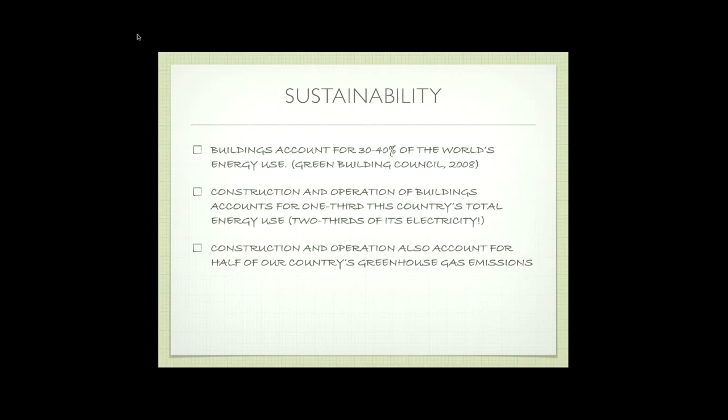So we get all up in arms over our cars and what they're doing to our environment, and very rarely do we actually consider that buildings are doing half the damage. That's why the theme of sustainability becomes important in this sort of class, and it'll be something we touch back on as we go through the semester and talk about these materials and why they might be good or bad.

So, does anybody want to take a stab at defining sustainability?

Something that would not be replaced or used up. Okay, sure, I like that. Anything else? Exactly, very good—use and reuse. Anything else anybody wants to add?

No? Okay, so the technical definition is meeting the needs of the present generation without compromising the ability of future generations to meet their needs. This is kind of the boilerplate example, but the big thing is that we're not depleting the resources that somebody else might get to use in the future. We're trying to be neutral.

We talk about being carbon neutral, we drive hybrid cars, we do all this kind of stuff. We talk about being green—it's the buzzword right now. We're going to try to go away from thinking sustainability in this class as 'I get to drive my Prius,' and instead talk more about what these building materials mean: how long do they last, can they be reused, those kinds of bigger issues.

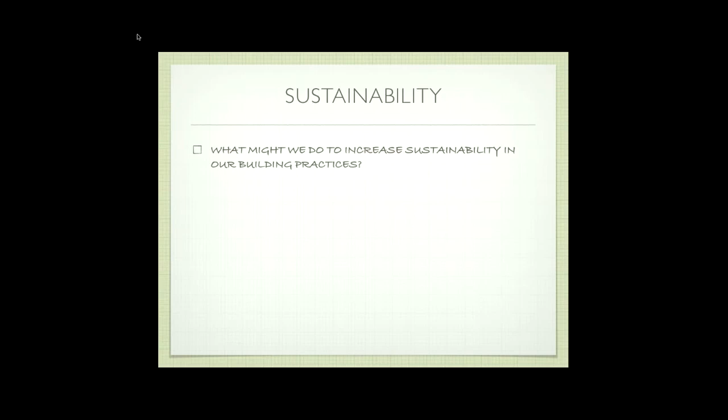Something that easily can be replaced. Right, exactly. Any other ideas? No? You guys are all quiet today.

It's okay. So how about if we use solar or wind energy? It's a renewable source of energy, so we're not depleting natural resources. It's something we can use over. What about if we use solar to heat the building, so we're not using any energy at all?

It's direct thermal transfer into the building. So maybe if we're in the desert, we use diurnal cycles, day and night cycles. The sun beats on the big thick wall during the day, radiates the heat to the building at night when it gets cold outside. Those kinds of things - can we use those abilities?

How can we naturally heat and cool? Just providing an operable window in a building can make the difference from having to run the air conditioner, or having somebody be comfortable just because they can open the window outside. Those kinds of things can make a big difference.

What about reusing an existing building rather than tearing it down? You know the average life of a tract house right now is less than 30 years before it gets torn down. It's kind of scary, right?

We used to build - and I live in an old ranch house - it was built well, built to last. Tract houses are built for 30 years, they're built to sell, and then they get torn down or substantially remodeled and sold again. It's a money-making thing rather than something that's sustainable long-term.

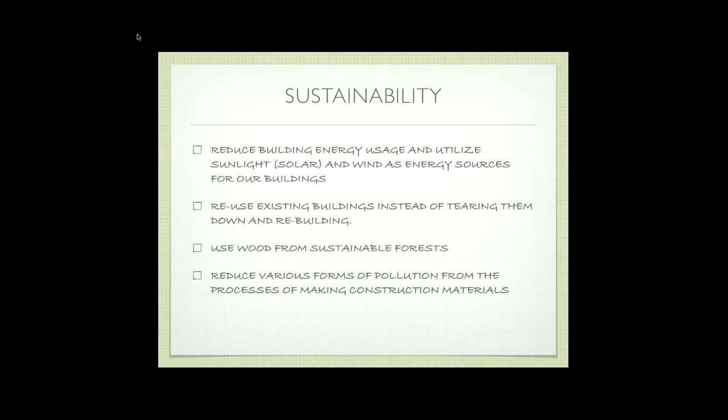Okay, so let's talk about sustainability in the life of a building.

The origin and manufacture of the materials in the beginning. Is the source of the materials renewable or non-renewable? Is the wood coming from a sustainable forest, or is it coming from a forest that practices clear cutting? Is the material a recycled material to begin with?

I'm not out here saying we should all use plastic bottles to make our houses. We're being somewhat realistic, talking about the big materials and how we can make somewhat of a difference without being too extreme.

The other thing is how much embodied energy is in the material. This is the amount of energy used to get the material from wherever it was made to the site, and that can be pretty costly.

The example here, going off on a tangent, isn't particularly a building material, but you've all been in the store and seen bottled water, the Fiji water, kind of the square bottle.

It costs more to ship that from Fiji to here than the water itself is worth. The bottle of water doesn't cost much at all. We pay $2, but 98% of that $2 isn't for the water, it's for the transportation from Fiji to here so we can drink it. That transportation cost is the kind of thing I'm talking about.

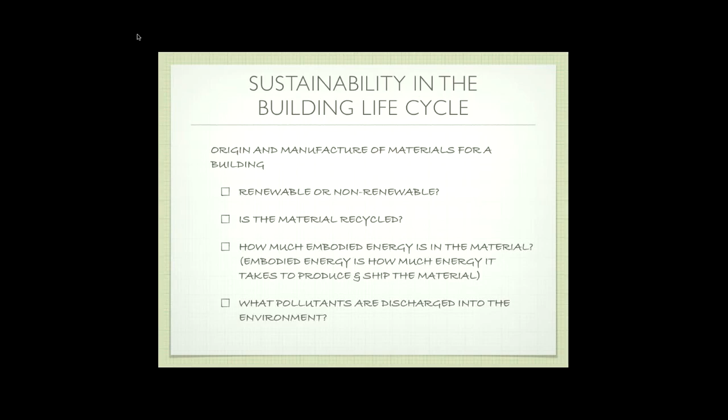Also, what pollutants are discharged into the environment during the process? You make cement, and guess what, you're going to discharge a lot of bad materials.

In terms of construction of the building, how much energy is used to transport materials to the site? How much energy and water are put to use on the site for the building? When we talk about slurry walls and that sort of thing, what about dewatering and excavation? All those things are big problems.

And what pollutants are associated with the installation of this material? I might also add, what about the pollutants that are naturally in the soil that you might unearth?

You're all familiar with Alameda? Anybody live in Alameda? Good, I can pick on Alameda throughout the semester a little bit. We have that Naval Air Station out at the end, great view of San Francisco, beautiful area. The problem is the ground is so toxic that you can't do any excavation.

They won't let you do any excavation there. This is the kind of thing we're talking about. You can't build anything there because the ground is too toxic to disturb. It's really acidic, isn't it? Yeah, super bad.

So we don't want to excavate. Or if somebody was going to plan a development, which of course someone eventually will, they're going to have to do so much environmental mitigation to cover up all the stuff they cause that it's going to be so costly to do it. But that's the kind of stuff we're talking about.

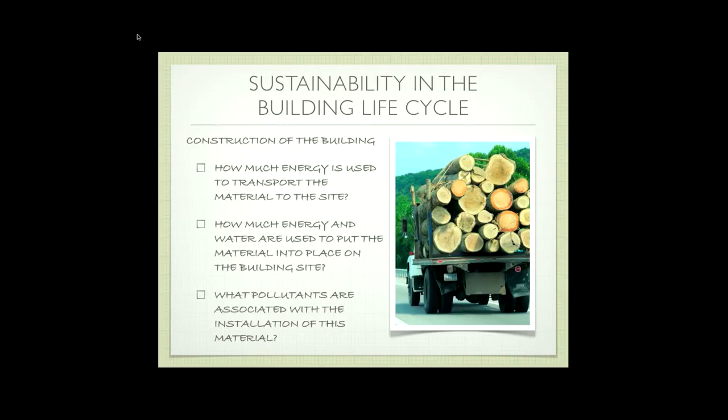We have problems. The other thing people often forget about buildings is there's an ongoing cost to the building beyond just the electricity to run the lights, it's all the maintenance.

If you've been out here, and some of you this is the first time, but if we walk around in a rainstorm you'll notice that little canopy over the walkway has about 10 different leaks. That's all deferred maintenance that somebody has to pay for and fix, and if they don't fix it, long-term it's going to cause problems.

So there are always going to be these kinds of maintenance issues, these ongoing costs associated with the building. The other thing is problems of indoor air quality. Are there weird off-gassings happening in the building that we should be concerned about?

You guys all, you get a brand new car, you keep the windows up because it smells so good, it's the new car smell. You've all done that? No? Oh, my wife totally did, her car windows up the whole time, still smells new.

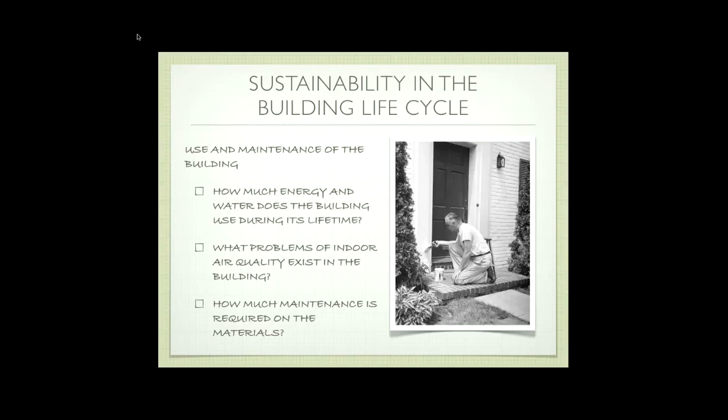That's all this off-gassing stuff that we probably shouldn't be breathing, right? But that affects the life of the building, right? So the other thing is how much maintenance, etc.

So the end of the building life cycle - how are we able to demolish the building? Number one, can we extend the life of the building so we don't have to demolish it in the first place? Number two, if we have to demolish the building, can we recycle any pieces of it? You'd be surprised in this day and age how much of this is actually recycled and reused.

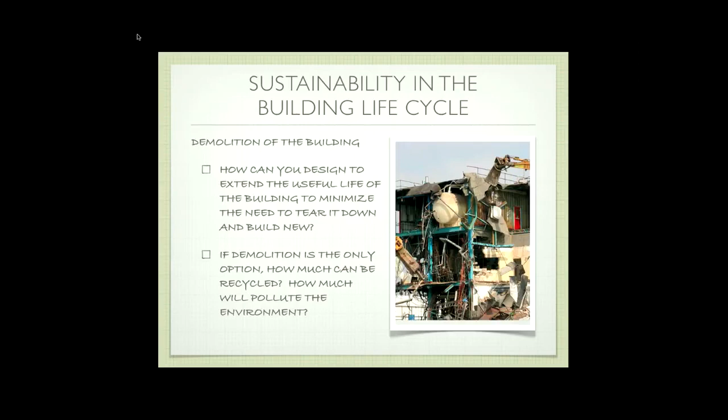From the local scale - I'm tearing out my kitchen, I put my kitchen cabinets on Craigslist and somebody buys them, or takes them for free because they want new cabinets. It could be something that simple, to something like this, where they're actually going to grind up all that steel and reuse it, because it's too valuable in this day and age. So, recycling the building itself.

Any questions about sustainability so far? No, kind of the overview sort of thing. We'll cover it more as we go along.

So let's talk about the work of the design professional. We're just going to try to establish some bounds based on construction and architecture and where that works.

Let's say I own a piece of property. I have to have some desire or idea that I want to build something new on it. It could be I want to build a house - I own a vacant piece of property, I want to build a house. It could be that I want to build a shopping mall. It could be a lot of different things. So you have to start with somebody who owns the property and then wants to do something.

The owner is then going to engage some kind of design professional - it could be an architect, could be an engineer, or a professional company that determines the best use of a particular piece of land. There are companies like this - I have a good friend who works for one. Somebody just comes and says, 'What should I do with this land?' And they go through an analysis and say, 'You really need to have a shopping center on this land because there's so many miles from the nearest shopping center.' There are companies that do this.

But let's focus a little bit down into the architect realm. They're going to develop some kind of a plan for the building, starting with an overall plan - I want to build a library on this particular property, I want to build a house, that sort of thing. And they're going to progressively get finer and finer levels of detail for this particular project. After approval by a local planning agency, this often results in some kind of construction documents that can then get sent to a contractor. Usually the owner will engage the contractor, and the contractor will build whatever it is that the architect has designed. So this is the normal flow of things.

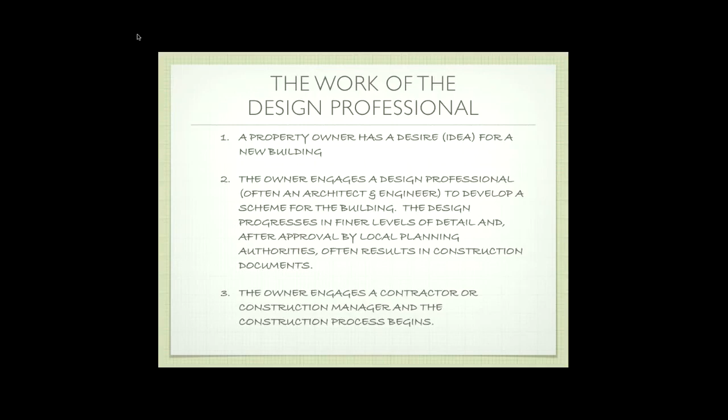Let's see if we can go forward. So the thing about it is it's the design professional's job to sort through all of these construction materials, all of the various options that are out there, and address the needs of the client, both in budget and in what the building looks and feels like, and also address whatever planning authority restrictions might be on the site. They're going to work through all that stuff and come up with some kind of reasonable solution.

My intent in this course is to familiarize you with all of these materials so that you could make this kind of decision. If you have knowledge of the materials, you can then at least help someone else make, or make these kinds of decisions. That's the idea.

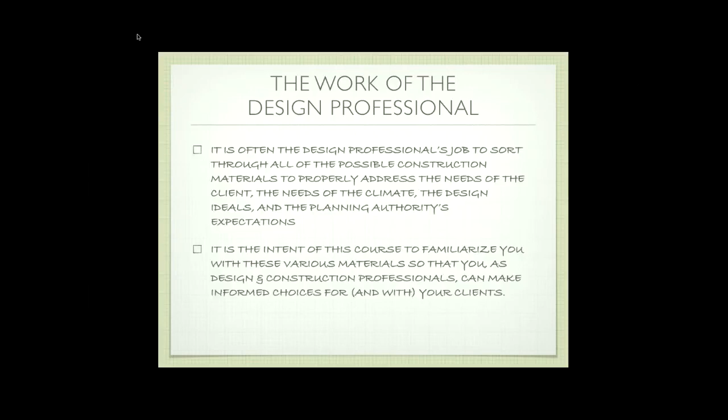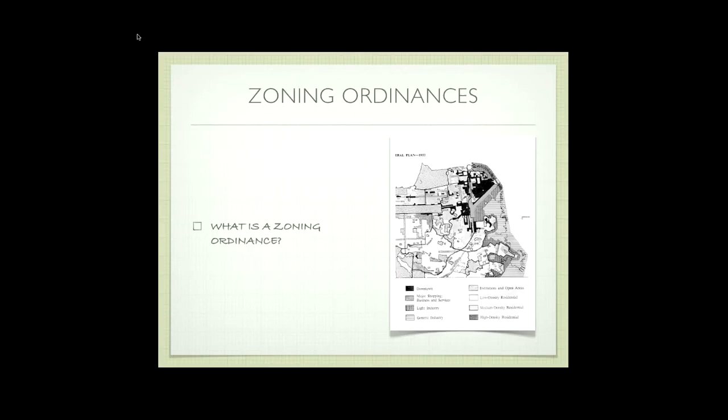So, a zoning ordinance - does anybody know what a zoning ordinance is? Exactly. So a zoning ordinance is something that the city sets up - I use the city loosely, could be a county - that determines what type of building can be placed on a particular piece of land. The city's going to give some guides, and this is going to help shape what the overall city looks like. It's controlled by a particular city that encourages development of a certain type in a certain area, and development of a different type in a different area.

It tends to restrict how much land can be covered. So if I have a lot that's 10,000 square feet, how much of that lot can I cover up with a building? How much open space should there be? That sort of thing.

It determines how far a building can be from its adjacent property line. If we look at San Francisco Victorians, there is no setback - you can build right up next to your neighbor. If you live out in the suburbs, there's probably a 10, 15, 20-foot setback from the side property, so you can't build right next to your neighbor. This controls the density - density in San Francisco is much higher than it would be out in the suburbs, and that changes based on this kind of zoning ordinance.

It also determines how tall a particular building can be. What's the maximum height? Can I go 3 stories? Can I go 4 stories? That sort of thing.

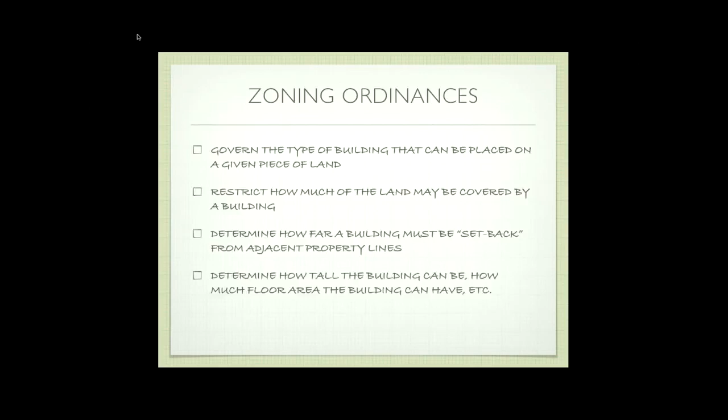Not everywhere has a zoning ordinance - it is by far the most common, but if we go down to Houston, Texas, Houston has absolutely no zoning ordinances. So if you own a piece of land, you can build a skyscraper on it, or you can build a single-family house on it. It's very interesting, and it's used very commonly in the architectural thesis realm as a case study for understanding how natural building would work.

Why is that? It's the decision that they decided to make. Maybe it's because it has a certain political affiliation in that area - they believe more strongly in property rights, that you could build whatever you want. Maybe it was just because they started doing it that way in the 60s, and it's just kind of lived on, and nobody wants to change it.

But it is a very interesting case study because you have a lot of diversity that you don't get in other cities. Other cities tend to be very planned - we have a downtown core that has a certain amount of commercial, maybe commercial with residential above, and as we extend out, we have more and more residential. So the nice thing about Houston is you have a very different diversity of how this works.

And lo and behold, even though you have this flexibility, there still are neighborhoods. It's very rare to have the single-family house next to the skyscraper - the skyscrapers tend to come together anyway. So it's a very interesting case study, but I throw it out there not because it's that relevant to you, but it helps illustrate the concept of zoning ordinances. So let's move on to building codes.

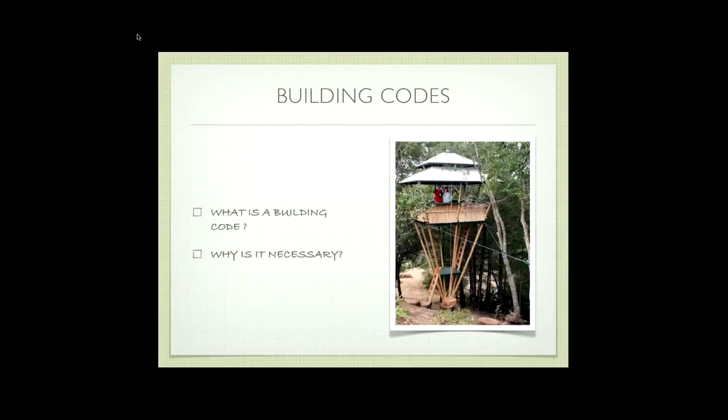So if you were up here, would you be a little wigged out? Maybe? What about if there was an earthquake? That freaked me out a little bit, right? So the idea of building codes, and the reason I associate this picture with it, is because they have to do primarily with public health and safety.

They're going to set minimum standards for construction quality - the minimum standards you have to achieve to have a building that's safe. The structural integrity of the building - is it built so that it can withstand the types of things that will happen? Here, is the building built so that it will withstand an earthquake? If you're back east, will it withstand a hurricane? If you're in the Midwest, will it withstand a tornado? Those kinds of things.

Basic structural durability and livability are a little bit harder to define. There are usually certain standards that we meet. An example of livability would be the minimum distance for an electrical outlet in a kitchen. We've got certain requirements - you have a kitchen sink, and within 2 feet of that, you have to have an electrical outlet.

Correct me if I'm wrong. If you have a wall that has no sink, it's every 4 feet you have to have an electrical outlet. So that's what we're talking about with livability - do you have a plug close enough to where you need to be? The fact that the plug has a GFI when it's next to the sink so you can't electrocute yourself, that has to do with just general safety.

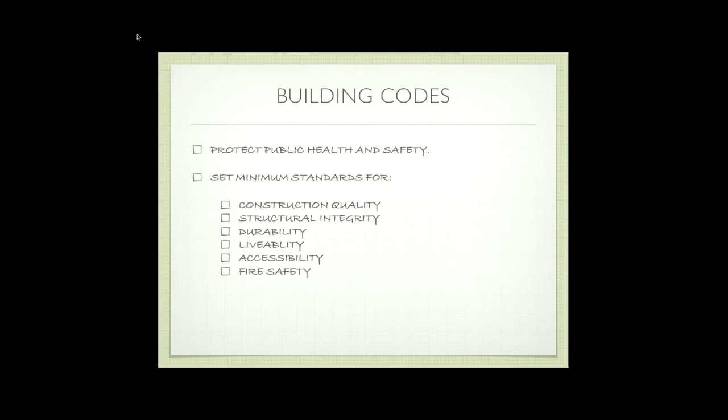We're also going to talk a little bit about accessibility - are you able to get in the building, what are the minimum sizes of the doors and that sort of thing. And fire safety - is the building going to be safe in a fire?

So the International Building Code, the IBC, is a model building code that cities or towns or counties can adopt and or modify to suit their own needs. But it's an overarching building code that is trying very hard to be a building code that works internationally, so that there are certain minimum safety standards across the globe. Does that make sense?

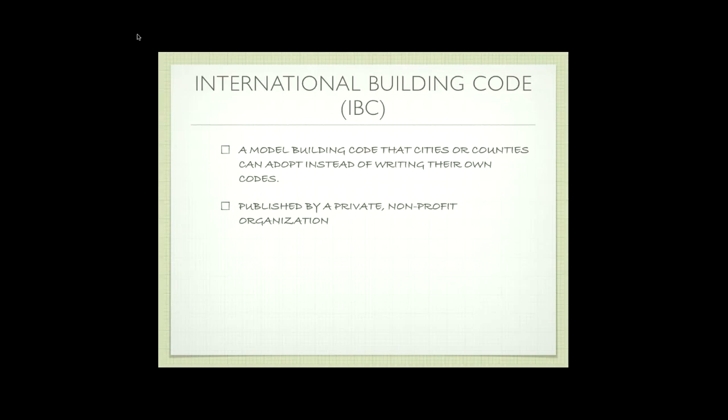It used to be that we in the U.S. had stricter standards than other places, and the reason we have stuff like this is because we're trying to extend those standards so that everybody is safe. This is published by a private nonprofit organization, so this is not a government entity. They're trying to be outside of the government so they can be more objective.

So within the International Building Code, we have what are called occupancy groups. This is a good place to take a little interlude and talk about the types of things I would ask on a test. I would never ask please tell me what an A2 occupancy group is - that's far too specific. Would I ask something about what is the purpose of an occupancy group? Yeah, but I wouldn't be that specific. I wouldn't say what is a type M occupancy group. So we're talking about bigger questions, does that make sense?

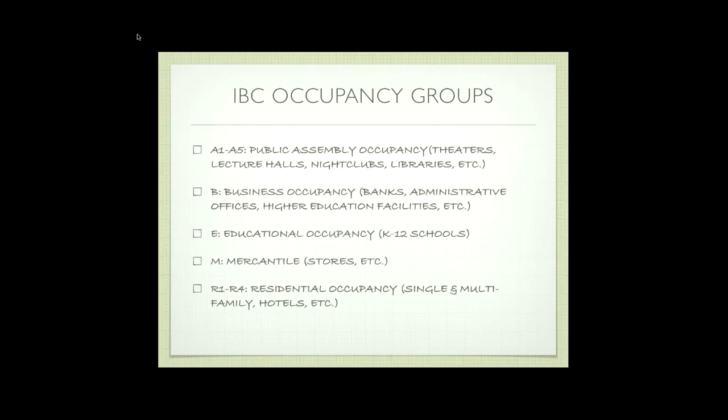But the point is we have some of these. A1 to A5 are big public places. B is a business. And so we can glean certain things from these types of occupancy groups. If it's a business, there's going to be people there during the day, not at night. If it's a big public assembly place, there's going to be big groups of people there at certain times, and it's going to be completely empty at other times. If it's educational - we're in an educational type setting here. Mercantile is like a store. And then we have R1 through R4, which are residential occupancy groups, meaning somebody's going to be there at night sleeping.

And so these occupancy groups are primarily there to distinguish various needs for safety. So if I had an occupancy group for a hospital, it's very different than if I had an occupancy group for my own house, does that make sense? We want to have certain standards that apply to a hospital and different standards that apply to my house, and it's an easy way of distinguishing between them.

Okay, so beyond groups, we have International Building Code types. Within a group, certain types are allowed. The types are specifically to deal with the amount of fire resistance of that particular type of construction. Type 1 is made from highly fire resistant, non-combustible materials - a type 1 example might be a concrete building, very fire resistant. So if you were building a hospital or a fire station, something that should survive almost anything, you would be looking at a type 1.

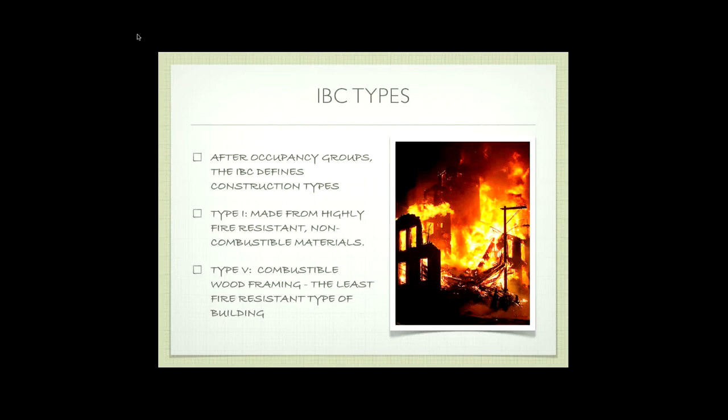If you're building a single-family house with one family living in it, you can move all the way down to type 5, which is built of combustible material, so it's wood framing that can burn, but we're going to do some fireproofing so that it's not unreasonable enough that you couldn't get out. So the point is the types just distinguish the amount of fire resistance of that particular building. Does that make sense? I'm not going to ask you for these kinds of information, but I put these up there just because if you really needed to know what a particular type entailed, you can always look it up.

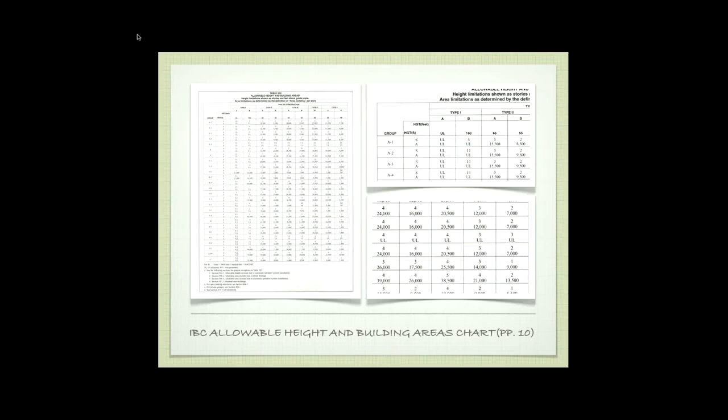You don't have to memorize it, just look it up. These are out of your book, page 10. So you can look it up and find out.

So then we also have construction standards. Construction standards have to do with the quality, or the baseline, of a particular material. So if we talk about cement, cement is cement is cement, no matter who you buy it from, right? This ASTM International, which formerly was the American Society for Testing and Materials, you've probably seen this logo on various products down the road. It establishes specifications for a particular material and a method of construction.

So ASTM C150 refers to Portland cement. If you go to Home Depot and buy Portland cement, it has to conform to this particular standard. So you know that cement you bought at Home Depot is the same as the cement, even though it's a different brand, that you bought at Lowe's. Does that make sense? So we have these certain standards so that we have a certain reliability and a certain expectation that a material is going to perform in a certain way. And this also allows for some abbreviations. So instead of Portland cement, we can refer to ASTM C150, and we know exactly what's allowed or what's not allowed.

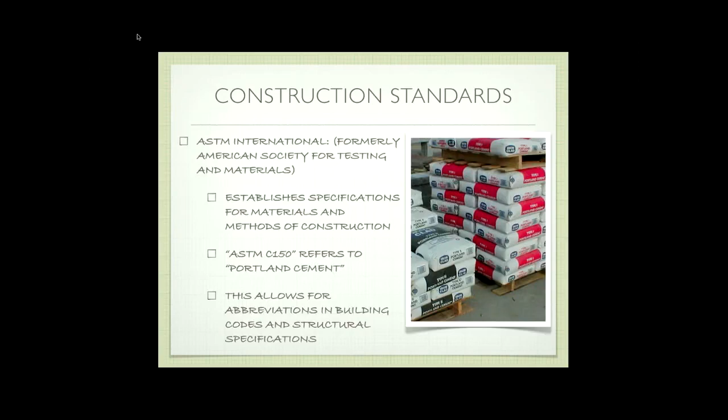So there's also ANSI, the American National Standards Institute, and it's a little bit different. It develops and certifies North American standards for a broad range of products, including windows and mechanical components—things that people buy. So it's like, I bought a window, it should meet certain standards for a window. I bought a furnace, it should meet certain standards for a furnace, that sort of thing.

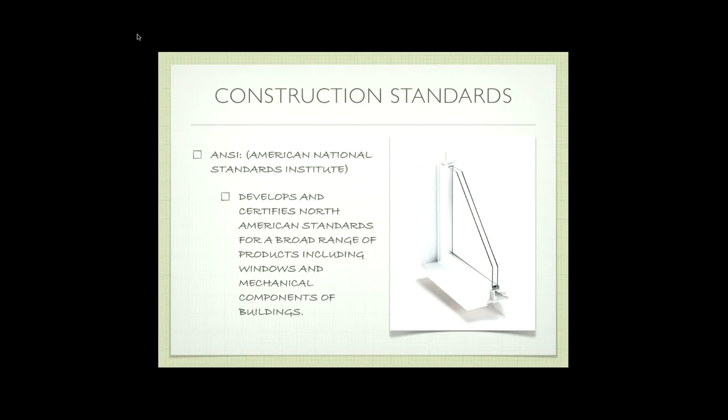Okay, so let's talk a little bit about constructing buildings. We started with the role of the architect, the owner. Then the architect comes in and designs a particular building based on all this various information we talked about—the building codes, the zoning ordinances, the IBC types, the group and the type.

Then we move into constructing the building. There's a variety of ways of going about constructing a building, some of which are more standard and some of which are a little bit different. So we have what's called the design, bid, build mode of construction. This is typical construction for a residential house.

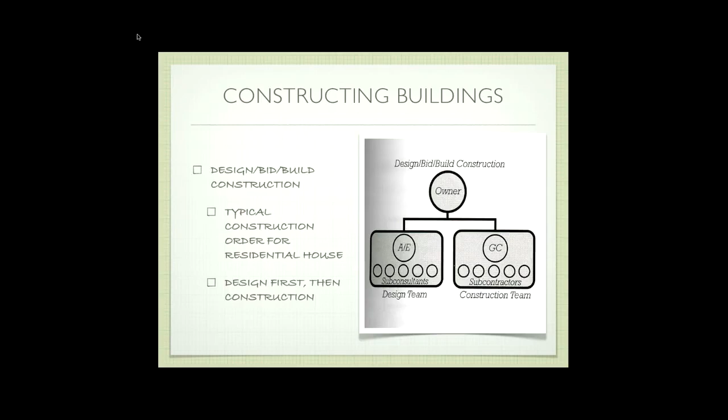It's design first, followed by construction. So this flow chart says: here's the owner, I own the land. I go out and hire an architect and an engineer. They design the building. And then I go out and hire a general contractor, and the general contractor builds the building for me. Does that make sense?

That's typical. So the other type here is called design build construction, and this is what I would consider myself falling under. I have a degree in architecture, so I can do the design work, and I also have a contractor's license, so I can actually build the building. So the owner, instead of hiring an architect or an engineer and then going out and hiring a contractor, hires one person who can do both.

And so this is a very different way of looking at the construction process. Generally, the design and the construction are very integrated, and it results in unique, highly custom sort of results because things can change as they develop. It's much less strict—it's not, here's the final product, I build exactly this product. It's, wow, I didn't see this coming, but now we have an opportunity to do this. And so we're just going to change it on the fly and do something different. So it's very different, and it takes a little bit of getting used to.

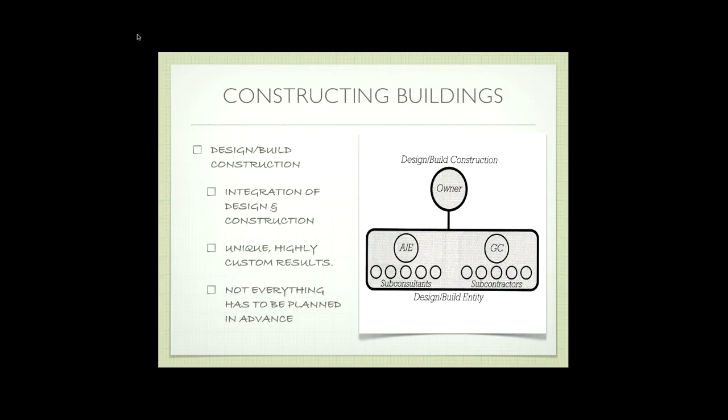It tends to be a little bit more expensive, let's be real about it. But it also requires less planning ahead—less 'I have a complete package,' and more 'let's just get started building something.' So it's a little bit different way of going about it.

Okay, so as we move forward, this is called construction management at a fee. The owner goes out and hires the architect and the engineer, and they design the building. Then the owner goes out and hires a construction manager. This is because they don't want to deal with the construction process, or maybe it's a large company that owns the land, and they don't want to be actively involved.

They go out and hire a construction manager, and then the construction manager goes out and hires the actual contractors. In this example, the owner hires the contractors, but pays the manager to manage the contractor. The owner is not directly responsible for the work itself. That's what the manager's for, that's why they're paying the manager.

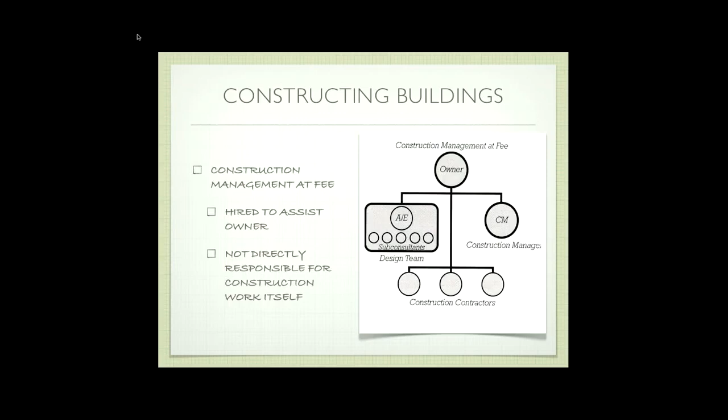Construction management at risk is what I meant earlier. The owner goes out, hires the engineers and architects to design the building. Then the owner hires a construction manager, and the construction manager hires the people that actually do the building. This is called 'at risk' because the construction manager says, I can build the building for this, and they're held to it. They're responsible for making the budgets and making the building built on time.

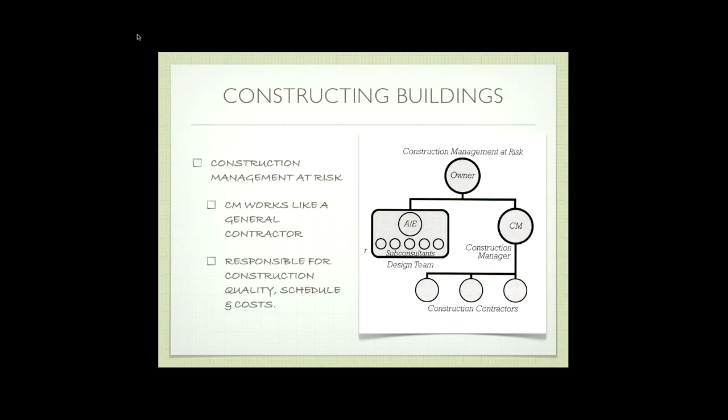So a little bit about scheduling. We can perform sequential construction, which would be if you were building a house. Generally you do the design first, then you'd bid it, sending that design package out to a contractor. They'd bid it and let you know how much it's going to cost. Then you would start construction and your house would finish. It's sequential, one after the other.

The advantage of phased construction, for bigger buildings, is you might start with design. You design the foundations first, then you design the shell and the core, and then the interiors. Bidding starts in phases too, so you finish the design of the foundation, and bidding on the foundation starts next. As soon as the bidding's done, they start the construction. So things overlap a bit more, and the building gets built faster.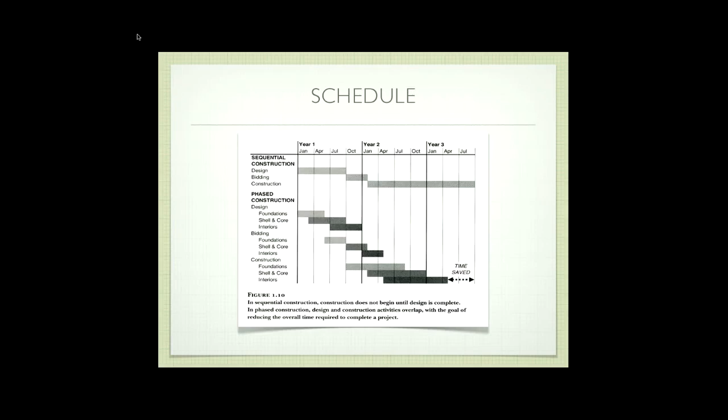So, team collaboration. This is part of the reason I like this class so much, is that we have people in the construction industry and people in the architecture industry, or trying to become people in those industries, and vice versa. Hopefully by the end of this class you will see what the other person is doing and understand their involvement and why. There's always this joke about the architect not really knowing how to build a building, and the contractor having to fix all the architect's mistakes. If you understand construction well as an architect, the contractor will be really happy. If you understand the value of the contractor and the fact that they know how to build the building, and you involve them, you can end up with a far better product out the door.

So I invite you in this class to start to collaborate and understand what the construction side brings and what the architecture side brings to the table. The more participation you have of the actual person who's going to build the building, the better the design is going to be. That's part of the advantage of a design-build operation. Overlapping of the design and construction phases reduces the time to market, which is what we saw in that phased construction example.